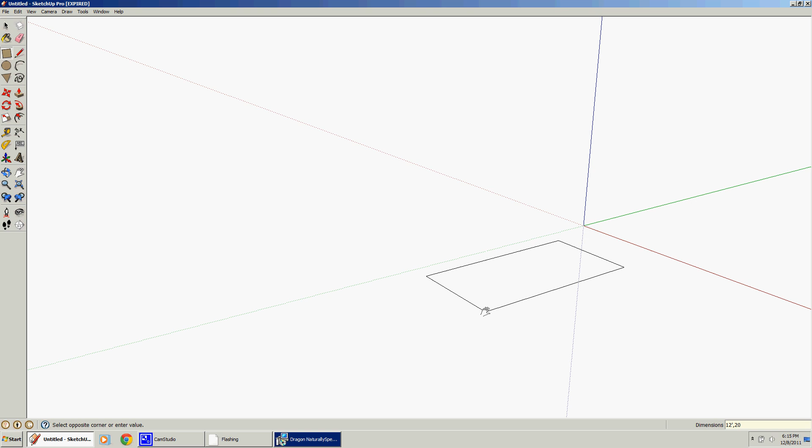We're going to do a 12 by 20, so we'll start our rectangle and type in my dimensions, 12 foot by 20 foot. I'll do my push-pull to give me some height here, go 8 inches. I usually make a component out of it right away so it's easier to move around. If you had the house drawn, you could slide it around on the house and get everything lined up right. So now we've got the basic outline of that.

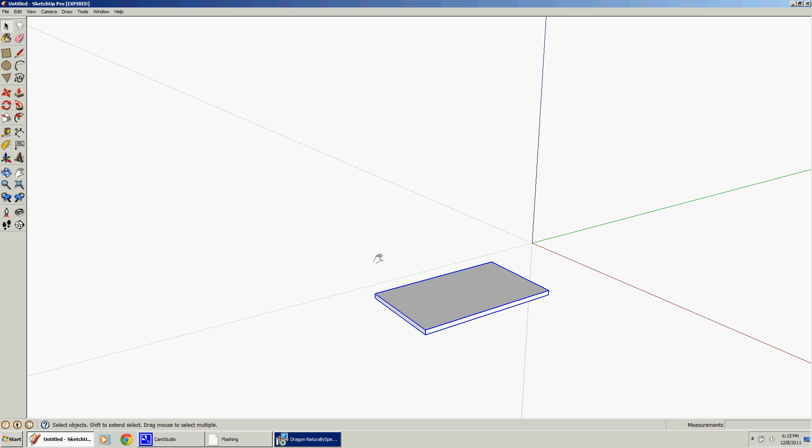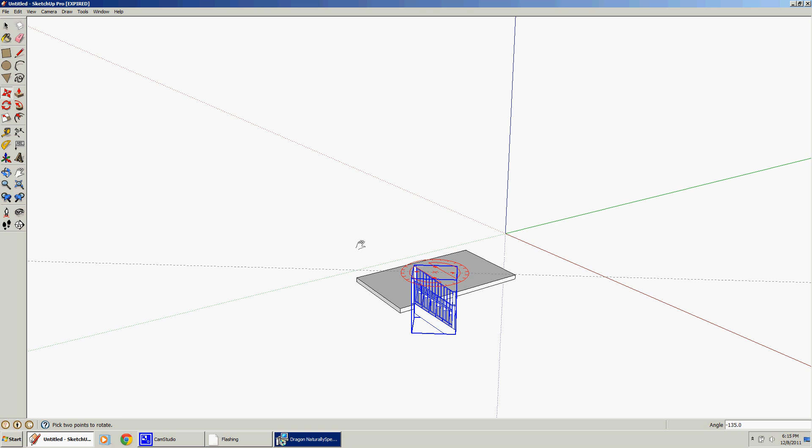So let's start, we'll put in some stairs. We'll start with a 6-tread staircase, spin it where I want it, then drop it in place there on the corner.

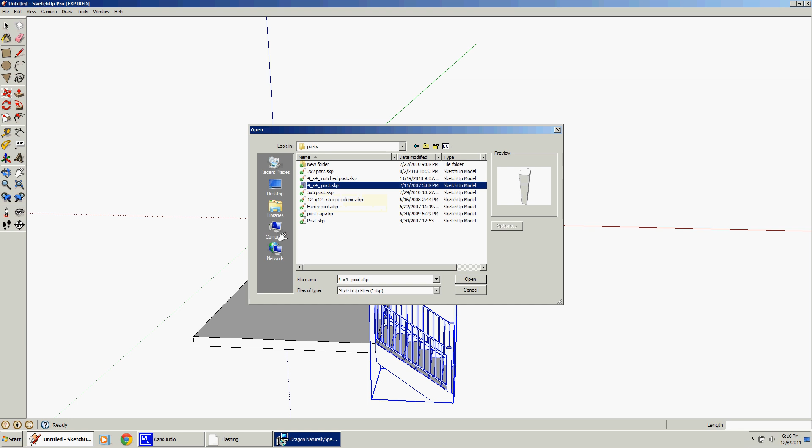Next we'll start with some rails. Start with the posts, import my post, control move, drop it over on the center there.

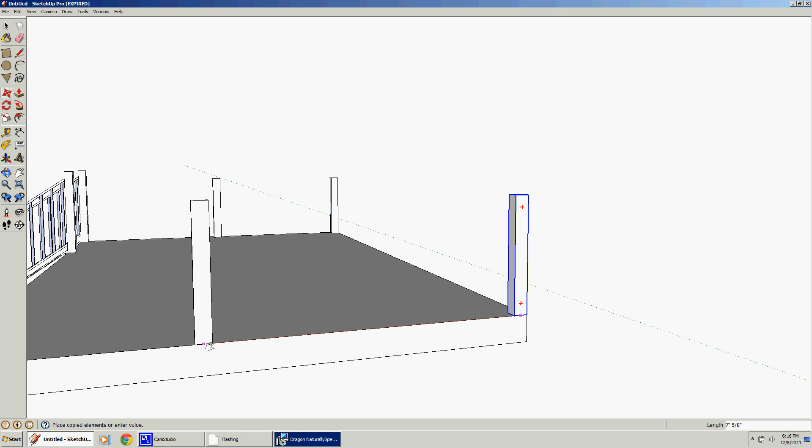So we're good, duplicate it over here to this corner, this corner, and the center again, lining it all up with the midpoints and the components so I don't have to think about anything. Over here I can't line up on the midpoint because the stairs have changed the dimensions.

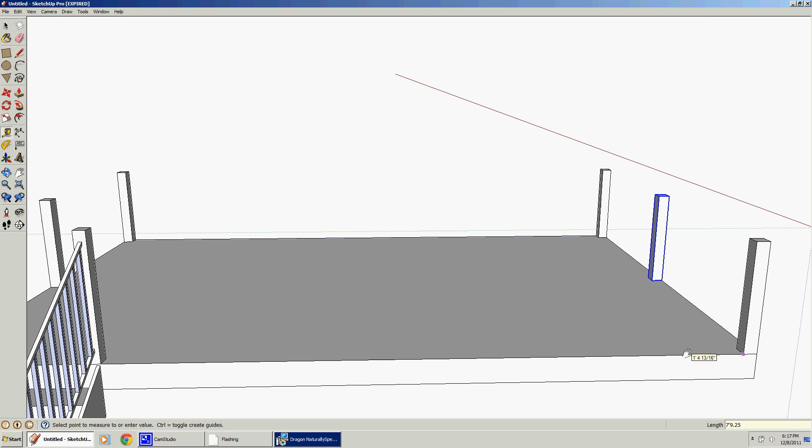So I'm going to come over here and measure it. We got 15 foot 6.5, so half of that is going to be 7 foot 9.25. So we'll pull off of there 7 foot 9.25 inches, and we're good there. Snag a post, drop it in place, and we should be all centered up.

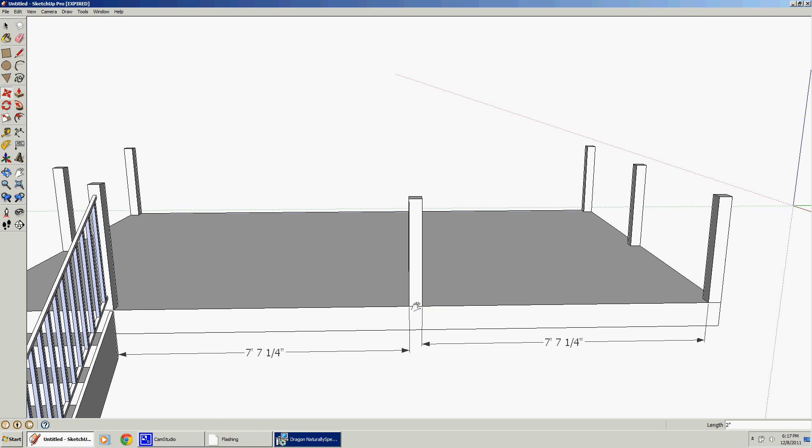Another thing, you can check yourself if you wanted to, and put in your dimensions like this. What's nice about using these dimensions is if you were off, if you have it snapped in between the posts like that, if you were off 2 inches, you can see it and make an adjustment. You can move it around until the numbers line up and match. That could be a way to save some time if you just want to drop a post in the middle there, close by, and stick it in there.

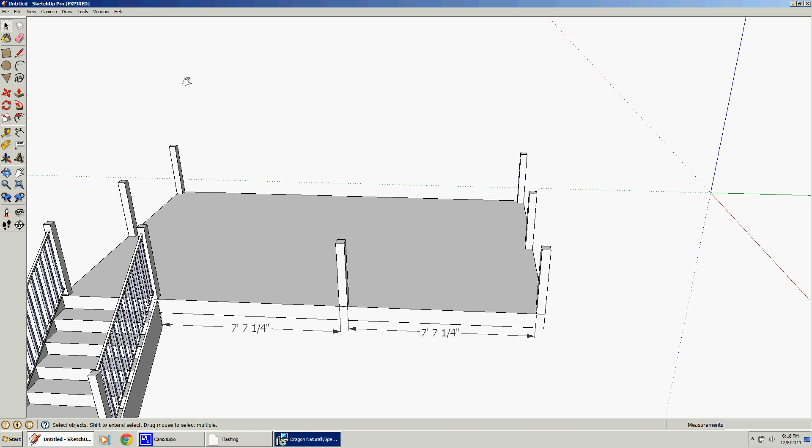It's good. Now another thing to save time is don't be too picky about it. If one said 7 foot 7 and the other one said 7 foot 7.5, I'm pretty sure nobody's going to notice on the 3D rendering that it's a little off, unless you're building your cut lists off of this. Then in that case you want to make sure everything is perfect.

Okay, now we're going to import some rails. I'd done my rails a long time ago, and we use Fortress rails a lot, or custom welded rails. So a lot of my components are built down to the inch, but you can save time by not doing that and just setting them in the post.

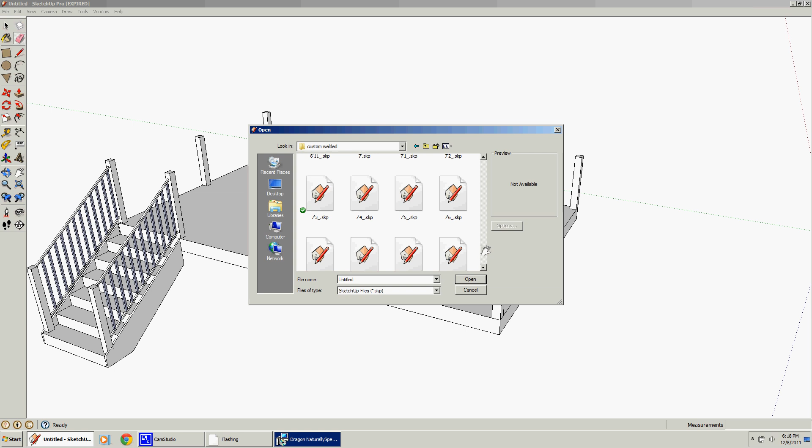So let's just grab the 7 foot 10 opening, or rail section, for our 7 foot 7.25 opening. We can just bury one end in the post a little bit, and it'll be fine. Depending upon how you color it up, it's probably not going to show.

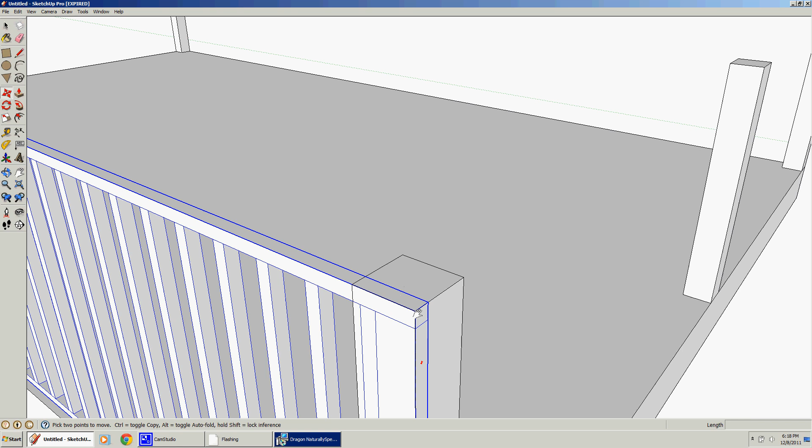So we could center them on the post if you want everything to be right. Duplicate, slide it over, and we're good to go there.

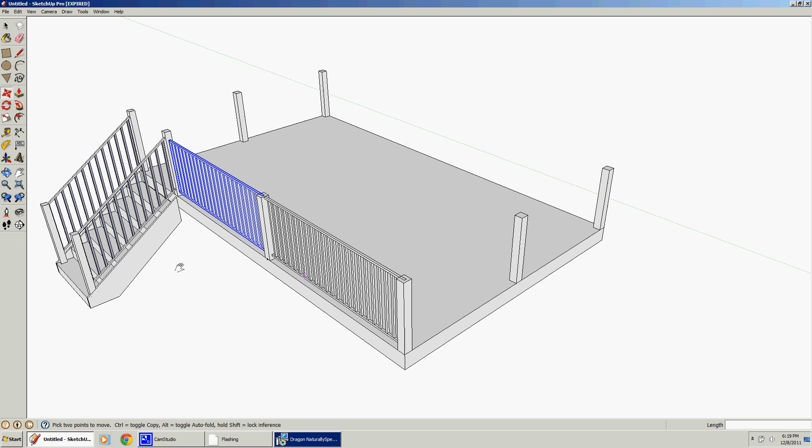And then over on the sides here, measure this opening real quick. 5 foot 6. Import some 5 foot 6 sections.

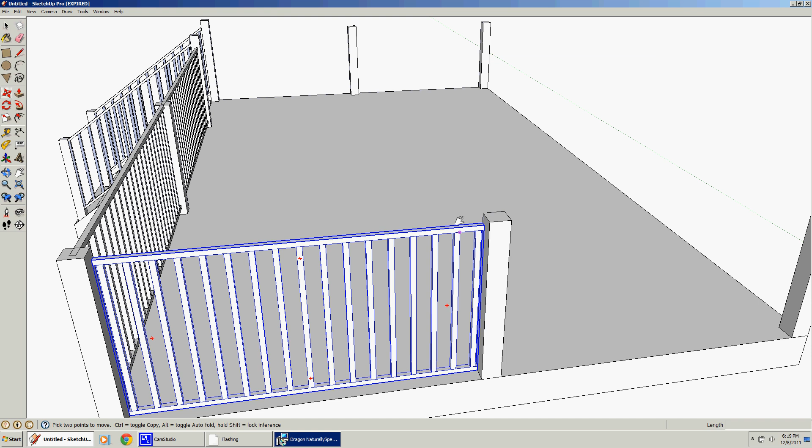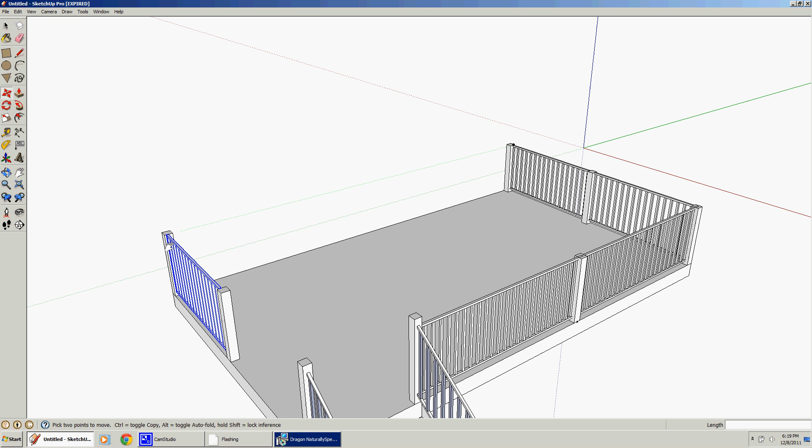That one I didn't get lined up right on center, but like I said, it's probably not going to show. Nobody's ever going to know for sure. We could do the same thing over here on this one, especially if you're using black Fortress rails. So we'll be painting all these components black. People are not going to notice that you're off a little bit. Even this little bit not touching the post would probably be fine. You're probably not going to see that little discrepancy in 3D rendering.

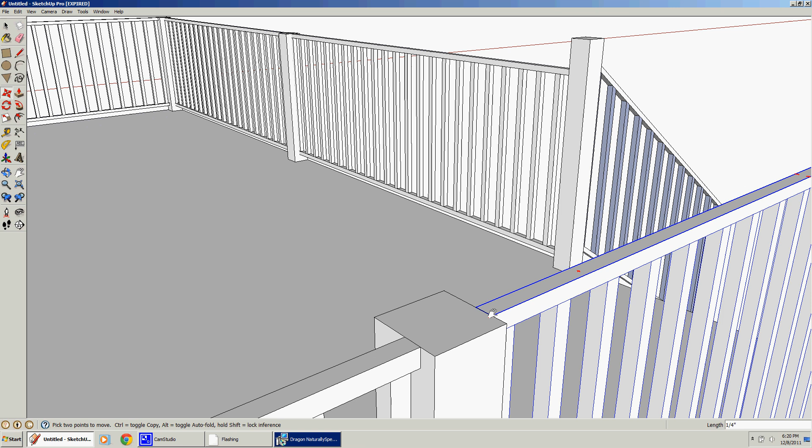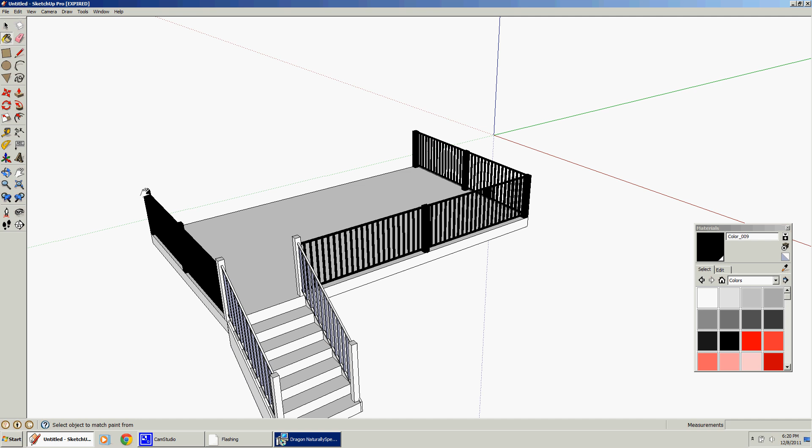And most don't care about everything being 100% right on their drawing. They're just looking for the general overview. So if you get something like that, it all looks pretty good. That's about what it's going to look like. And then my stairs, the way I have them built in components, makes it a little more time consuming to paint them all up, but it's not too bad.

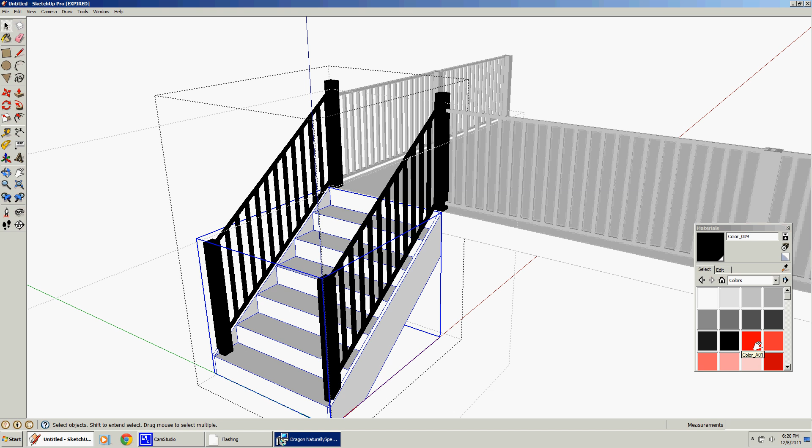So let's do a multicolor tread and riser fascia. So we'll go to our library for our decking here. We'll use Fiberon Ipe for the treads, and we'll use the rosewood for the risers. Wrong one. I've imported all of the color chips from the manufacturer's website, so they're all pretty close to accurate. So we'll paint up the fascia there.

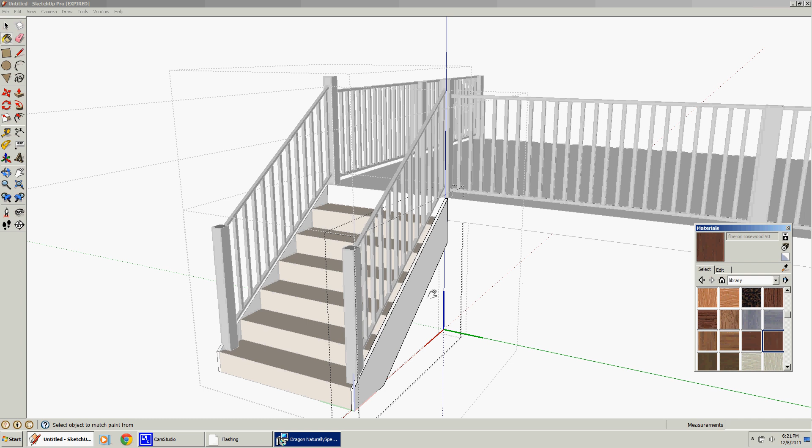So now that's done. Now we can do up our fascia on our deck real quick. And when we work with Fiberon, we use the deck boards as our fascia. They don't really have a cap layer fascia out yet, so we want something that's going to match the cap layer composite and last as long. So there you go. There's a quick basic deck there.

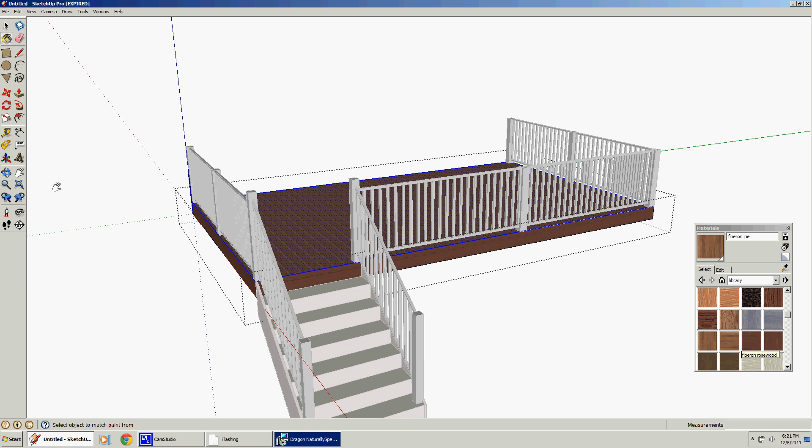On a deck this high off the ground, people are probably not going to care about where the post and beam are. Most everybody kind of knows what that looks like. They want to know what their basic deck looks like on their house. So you could draw something like that up real quick. If you wanted to draw in the post and beam, you could do that.

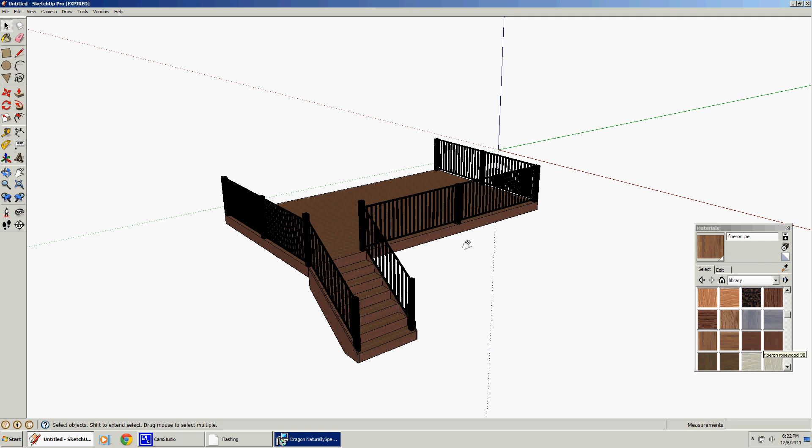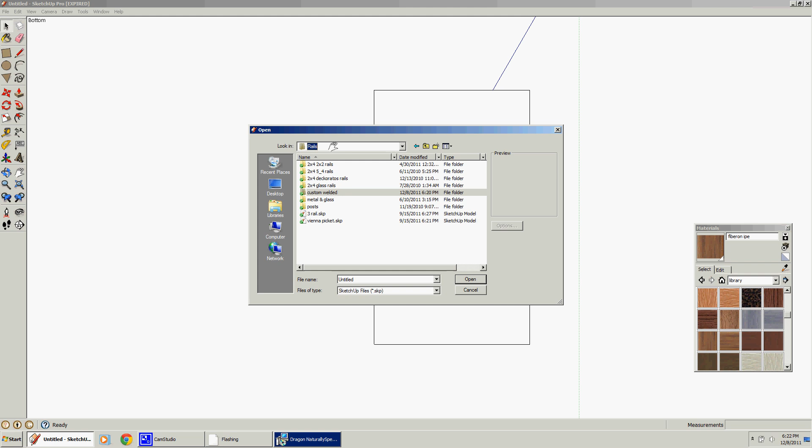And then if I wanted to turn this into a set of blueprints, what I would do is change my view to the bottom so I get a straight view like that. I'm going to hide these stairs because they don't work as well in blueprint mode. I'm going to import from my SketchUp directory. We do a lot of stuff on 12-inch centers, so that's what we do most of our stuff at. So I'm going to rotate those joists. Since this is a component, it's not going to go real well.

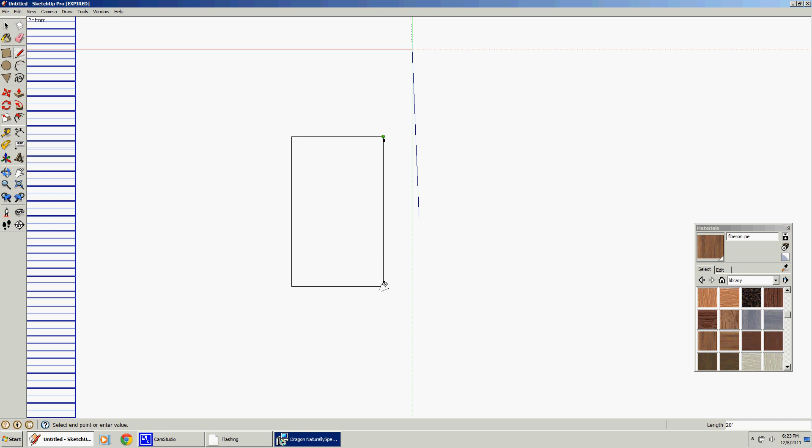I'm going to trace an outline around it so that I have my 12 by 20 again. And I'm just going to drag this over here, stick it on the corner so it lines up with the corner of the deck. Right there. And you can see all this excess here. If I explode it, I don't know why I have it double component, but explode it, and then I can just erase all of this in here.

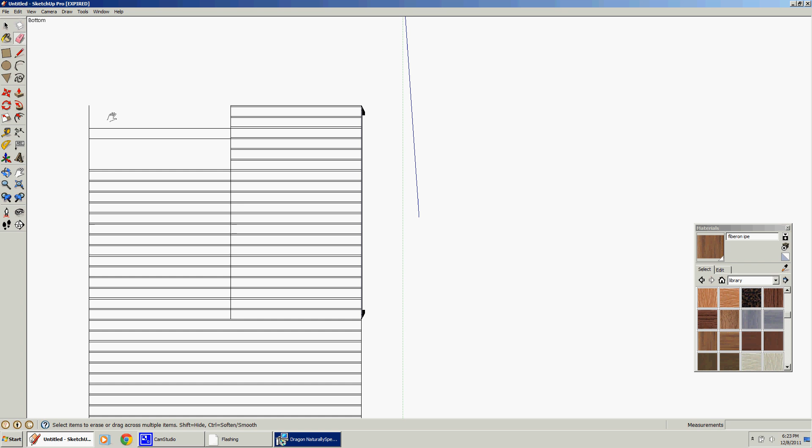I've got this blueprint drawn already, and it's on the bottom side of this deck. There it is. All the joists are there. So I can draw in some beams and pier holes, and in this case right here, I have one spot on the edge that didn't quite work out, so I might have to draw in one single joist there. But I usually do the measure line, do that, and it's done.

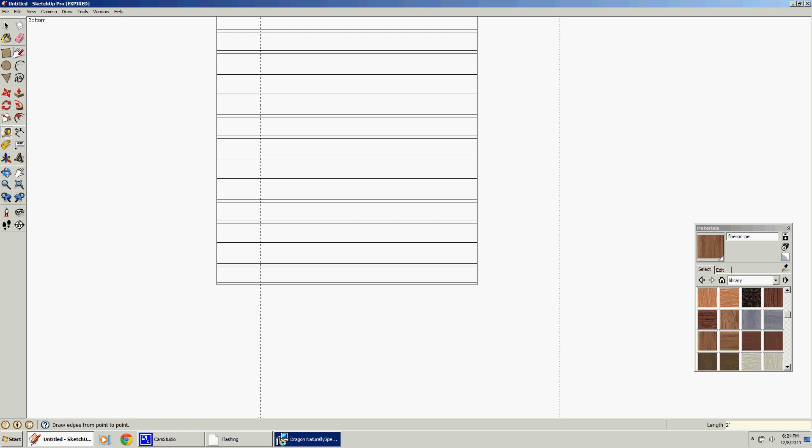So I'll draw in my beam 2 foot back, and carry on from there. So that's how I draw one up in SketchUp.